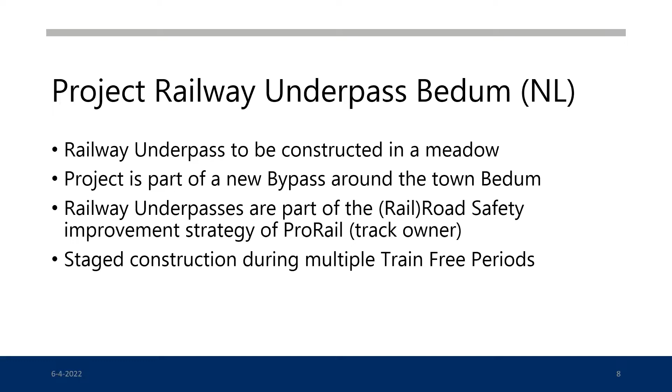These underpasses obviously have to cross an existing railroad track, so the work is done during multiple train-free periods. Those train-free periods are during a weekend, so no detours, just no trains for 24, 36, or even 72 hours. Those trains are replaced by coaches, so traveling during that period will take much longer. The promise of the contractor is that trains have to be back on track by rush hour Monday morning, otherwise they will get huge claims for logistics problems, more coaches, and loss of time and turnover by companies who depend on it.

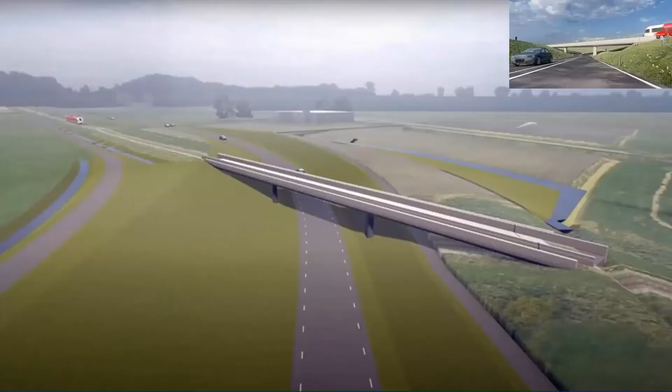This is what a typical level railway intersection can look like in the Netherlands, and this is what we would like to make in future. What you also see is that the road is separated from the bicycle lane, so safety increases much in this case.

The rail deck foundation that you just saw on the artist impression is bearing on 2 abutments with 8 screw injection piles with a length of 75 feet each, and 2 intermediate piers with 12 screw injection piles each, up to 101 feet.

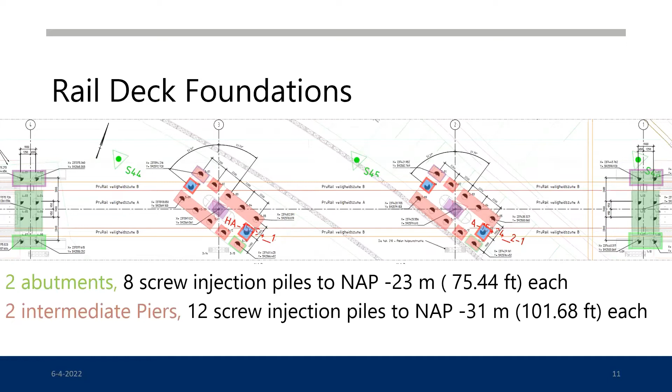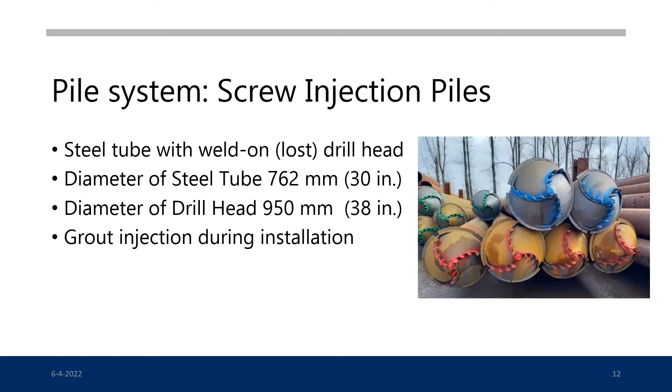For those who have never heard of this screw injection pile system, it's quite common in the Netherlands and Germany. In this case, we use a steel tube with a lost drill head, but we also make these piles with a temporary casing which is extracted after pouring concrete in situ. In this case, a lost steel casing with a diameter of 30 inches and a drill head of even 38 inches. We use grout injection during installation as lubricant and to improve the bearing capacity of the steel casing.

The soil conditions in this particular project are quite different from what we're used to in the Netherlands. In the Netherlands, most construction projects are in the west of the country, close to the sea, in one big river delta, where we have very soft clay, the Holocene layer, on a Pleistocene sand layer. The Pleistocene sand layer offers bearing capacity, and that's what all the engineers know - they know how to deal with it, and how piles perform in that particular layer.

However, in this area, when you look at the cone penetration test diagram, you see from 13 meters below surface, over-consolidated stiff clay. We know it is pot clay.

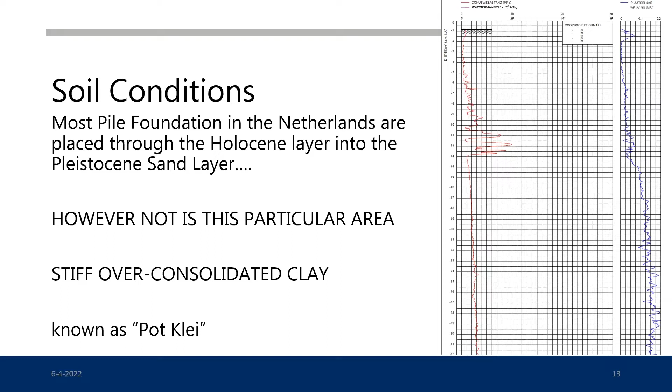This gives a whole other approach to bearing capacity, but in the Pleistocene sand layer, which I mentioned, we look at end bearing of piles and high friction ratios close to the pile tip. And in this particular case, we forget about end bearing, and we have to get this bearing capacity from shaft friction, but we don't know so much about this pot clay bearing capacity.

So we have a good couple of tests, but they are all very old. Statistically, they are much away from each other. So we have kind of safe values in our code, and it's not common practice to do pile tests in projects in the Netherlands. We are very much dependent on our design methodology based on cone penetration tests.

Also these pile lengths, which I presented, 31 meters, it's rather long for what we are used to. Luckily for this project, we had some training before we had to install piles during those train-free periods.

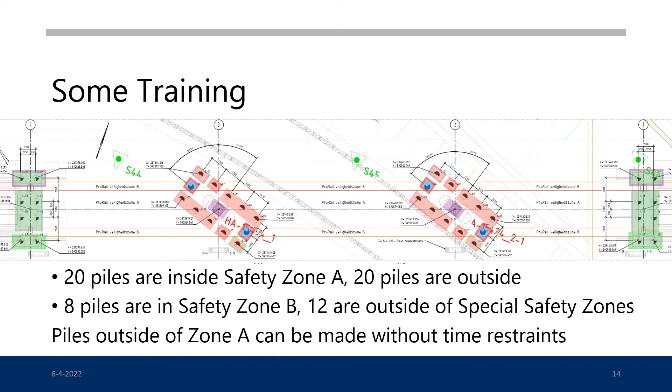Which meant that we could test our performance of installation before we were on this tight schedule of a train-free period. This is when we first found out test piles would have been a good investment, because some of those training piles took over 6 hours. We only budgeted for 2 hours. Yeah, that's a pity as a contractor. However, that's your own money, but not making it in a train-free period, that's a real problem.

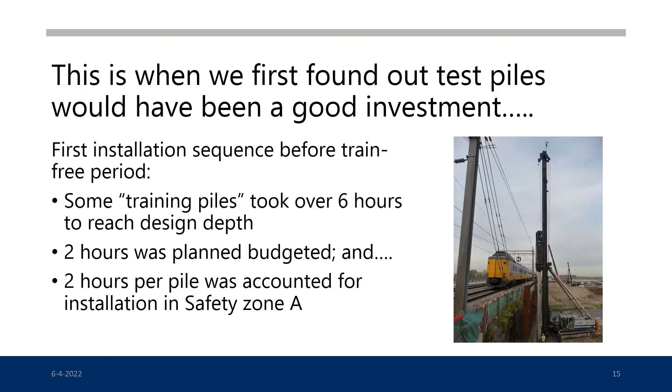The probable cause of these disappointing installation results were the limited effect of the cement grout in clay. Normally we use cement grout in sandy layers, and it helps us as a lubricant to screw those piles to the design depth. The same case for these lost drill heads which you just saw. Those seem to be less effective in clay.

Another factor was because these piles with those 30-inch tubes and 38-inch drill heads tend to start floating when they reach a certain critical depth. This was not looked at by the engineers beforehand. It's not that the piles come out, but at a certain moment the uplifting force tends to be higher than the pull down force of the piling rig, so you don't go anywhere.

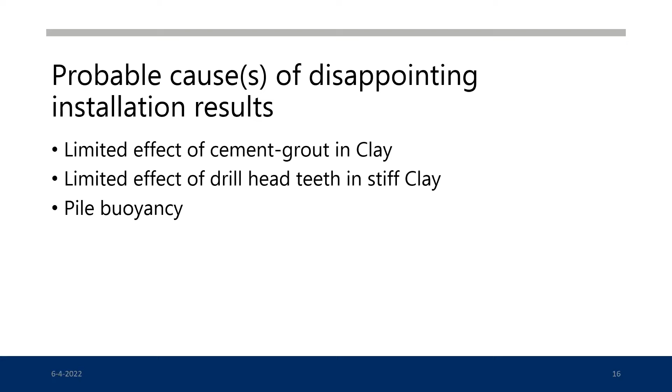So normally you use a grout with a low water binder ratio in order to have a high cement content, which gives your mixed in place mortar that you create during installation some strength. You take it as an interface so you can take into account a larger diameter in your design calculations.

In this particular case, the grout was only working against us during installation, and since the water could not drain properly in the clay, we were only pushing the pile up extra next to the floating problem after reaching critical depth.

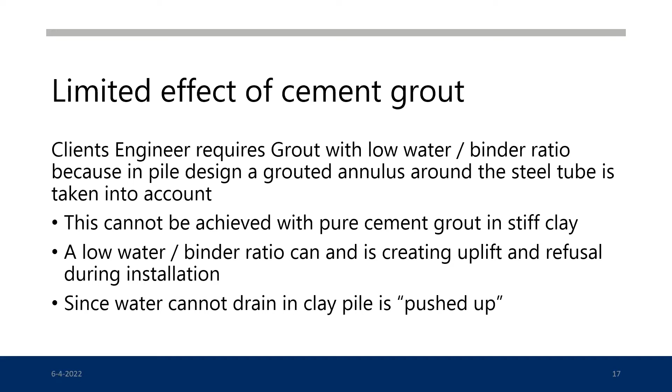The limited effect of the drill head teeth in clay. We found out during installation that the clay was clogging underneath the drill head between the teeth, and we get a bulb of clay underneath this drill head, and the teeth were not effective anymore. Normally in sands, they just cut through the sand and spread the grout around.

Well, and we have a very efficient installation process.

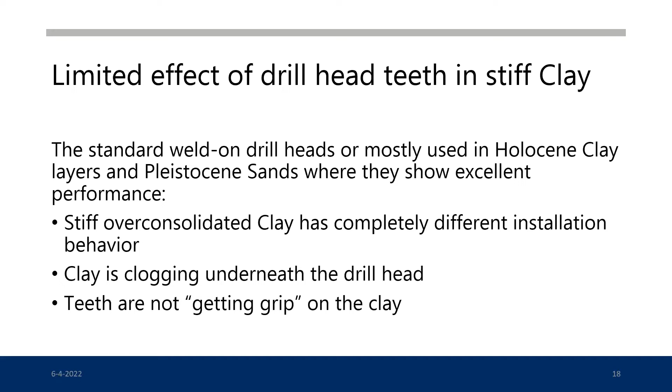About buoyancy, this could have been foreseen. Normally with smaller pile diameters, the weight per area is higher, and you have your rig's pull-down force, which is much higher than the buoyancy of the pile.

What we normally do when we have large diameter steel tubes with a closed toe, we fill this with concrete during installation. However, in most cases, we don't have reinforcement over the full length of the pile, so you fill it until the end of your reinforcement cage, so you can place the reinforcement cage only after installation.

But in this particular case, we had reinforcement cages over the full length. So in order to fill these piles with concrete during installation, the cages had to be placed also during, or even before, installation.

Because we were looking at pile installation during a train-free period with a cycle time of only 2 hours per pile, we later placed these reinforcement cages in the steel workshops where the steel tubes were assembled.

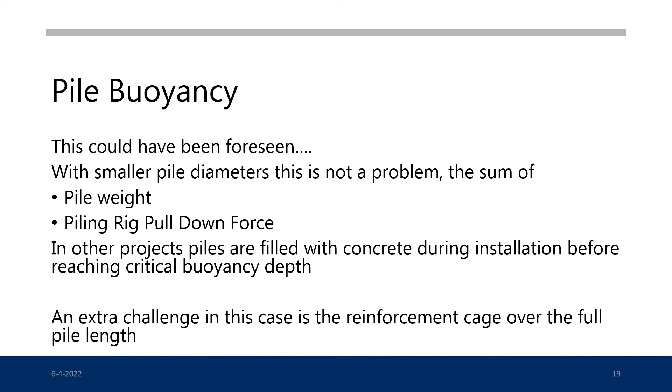Well, the measures taken to improve installation cycle time in the second training were a decrease of cement content in grout. We discussed it with our client, with the engineers, and together we decided to add some bentonite to the grout, but still with a large cement content.

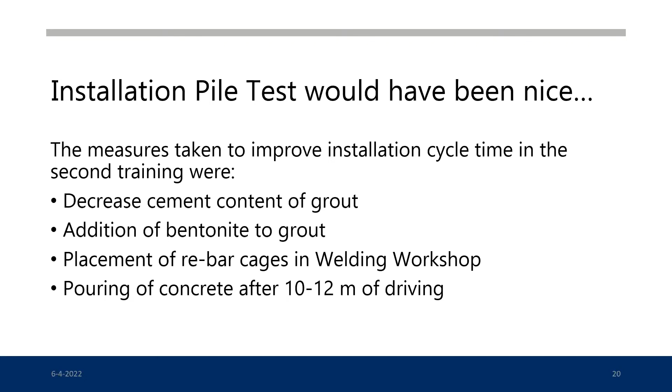As I just said, placement of the rebar cages in the welding workshop, so no extra works on site. And pouring of concrete we did with a concrete pump truck after 10 to 12 meters of driving, so before reaching the critical depth for buoyancy.

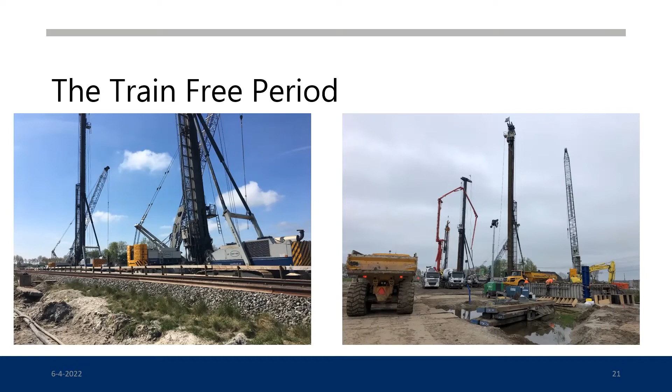Well, this is what it looked like, the left-hand picture just before start of the project, and at the right-hand picture, the tracks are taken away, and nobody has an idea that there has ever been a railroad track. But on Monday morning, it looks again more like the left-hand picture.

Well, all piles were installed successfully in the available time frame. So the trains were running on Monday morning along the tracks that were brought back in place, just on the normal ballast bed that was in place before we placed the piles. So the piles are not yet in function, but they are there for the next construction stage.

Well, the next construction stage would be within about 2.5 months. But after evaluation of this first train-free period, we found out when checking the piling logs that there was high water usage during pile installation, low cement usage, and bentonite - well, we used much more, kind of in line with liters of water.

Grout density at the start was too low. Grout density halfway the installation process was too low, and finally the grout density at final depth of pile installation was okay.

Normally during installation of these type of piles, you have your grout backflow. So probably, while reaching design depth, all the grout with low density is already displaced, replaced by grout with a higher density, so with the agreed cement content. However, you cannot prove that there is not either a bentonite interface on your steel tube or between the soil profile and your grouted annulus around the pile.

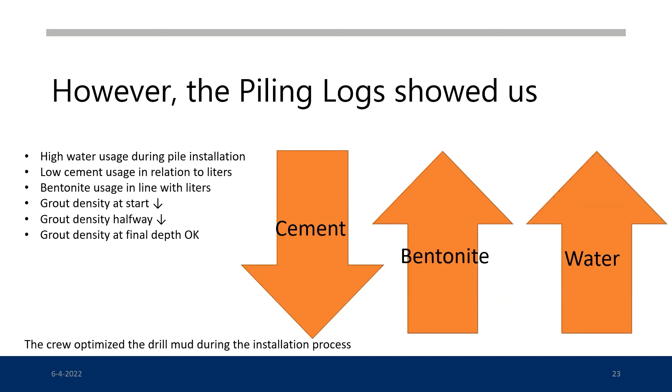So that was a problem. We had a crew who optimized the drill mud during the installation process and managed to install those piles on time, but we obviously did not do what we promised.

So we discovered at the end of August 2021 that we had this issue. The next train-free period would be on October 22nd, 2021. So we had 2.5 months to go to prove the piles had the required bearing capacity. Normally, when you have some piles that are not trusted, you can test them, and in that way prove they are okay. In this case, we only had the installation logs that showed we did not do what we agreed.

Nobody had much experience with this type of soil, and no consulting engineers or other contractors did either. The piles were under the railway track, so we could not test them. We had 2.5 months to install sacrificial model piles and do the testing that should have been done beforehand, before the next train-free period.

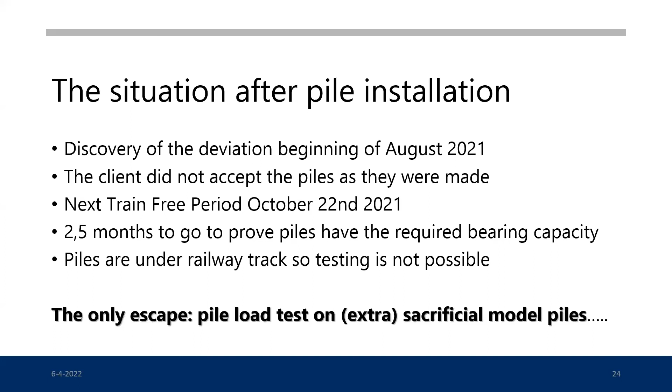What was above our heads? Scenario 1: the next train-free period could not be used to place the deck. So you get a change of design, a modification of the foundation, and if you modify the foundation you obviously need more piles, which means modifications to the deck.

Two extra train-free periods would be required: one to place the extra piles, and one for the deck placement. And you have potential claims between 500,000 euros and 1.5 million euros, plus a lot of reputational damage in the industry.

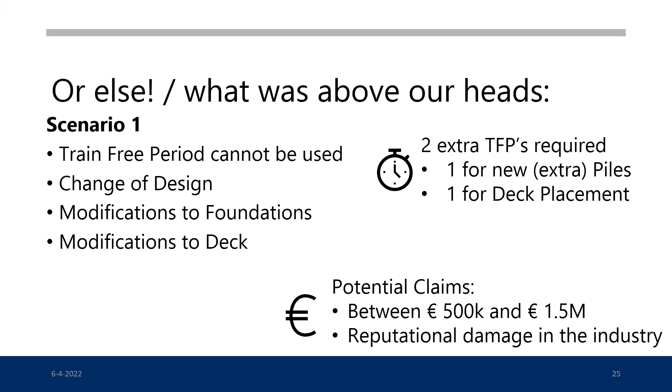Scenario number 2 was even worse, but we were the ones who pulled the brake to avoid it. If our client accepted the piles as they were on a theoretical motivation, we would have risked unacceptable settlement after commissioning of the underpass. This meant risk of severe delay damage, taking the train tracks out of service, potential claims certainly above 1.5 million euros, and severe reputational damage, not only in the industry, but probably an 8 o'clock news item.

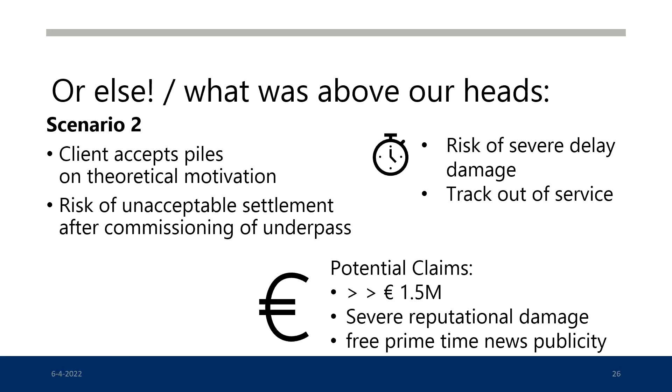We had 2.5 months until the next train-free period. It took us 4 weeks for the test setup design and additional soil investigation at the place designated for the test piles, followed by immediate installation of test piles, with a setup period to develop the shaft friction.

This took 1 month. After installation of the test piles, together with our client, the contractor, we informed the railway authorities and local authorities, and agreed on the test result interpretation protocol. There was no time to inform them before, because we knew if we got into a discussion about this setup, we would for sure not make it in 2.5 months.

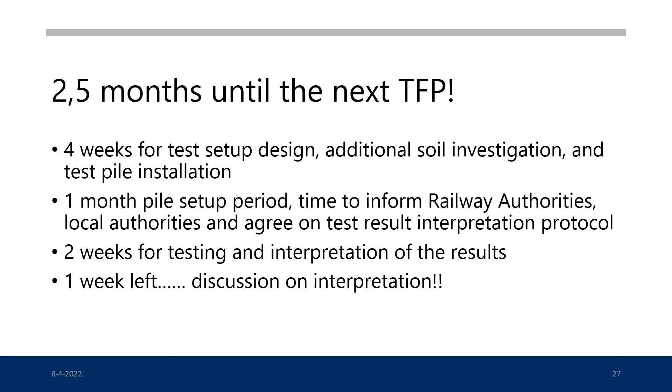After 2.5 months, we had 2 weeks for testing and interpretation of the results, with 1 week left. Here you see a picture of the test setup.

We took scaled piles, 22 inches, with a grout composition as found back in the pile logs from the piles installed during the train-free period—so with low cement, much more bentonite, much more water. We had a test setup with 325 metric tons in kentledge capacity.

The pile failure load, we found out, was about 200 metric tons. Why then a 325 metric ton setup? Because we could not agree on the actual pile bearing capacity, taking into account all the layers that are there but do not contribute to the bearing capacity, yet would definitely interfere with the testing.

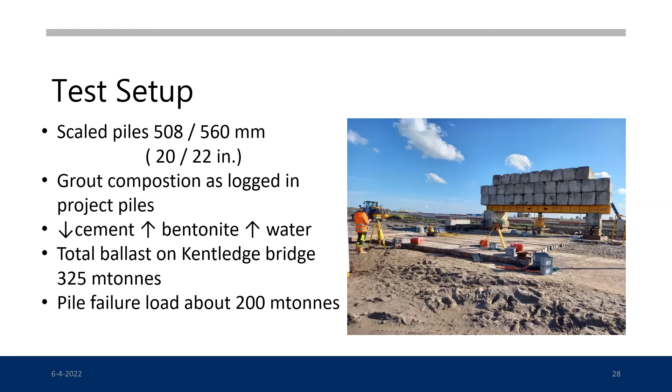We needed this extra week badly because of strain gauge interpretation. Short story: you can never have enough strain gauges, because some went out of service. There was some discussion about the trajectories below the strain gauges, which could have been divided better if we had used more strain gauges.

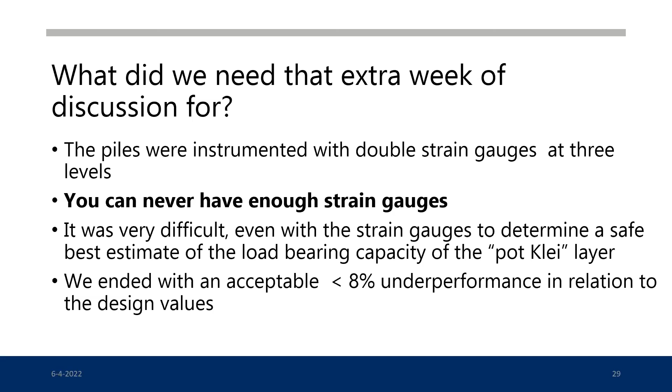In the end, we found a safe best estimate of the load bearing capacity of the pot clay layer, which was what it was all about, and we ended up with an acceptable less than 8% underperformance relative to the earlier chosen design values. We had about 8% left in our safety factors, so we saved the day.

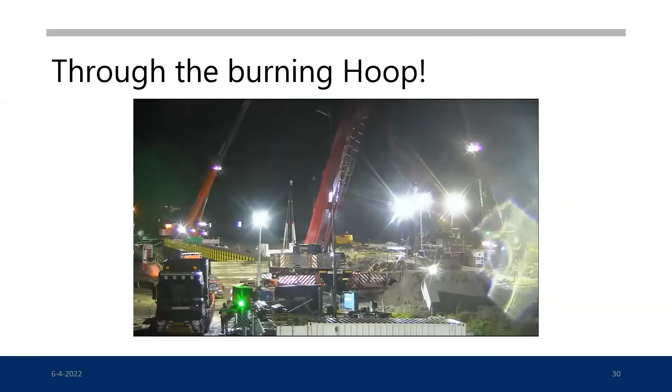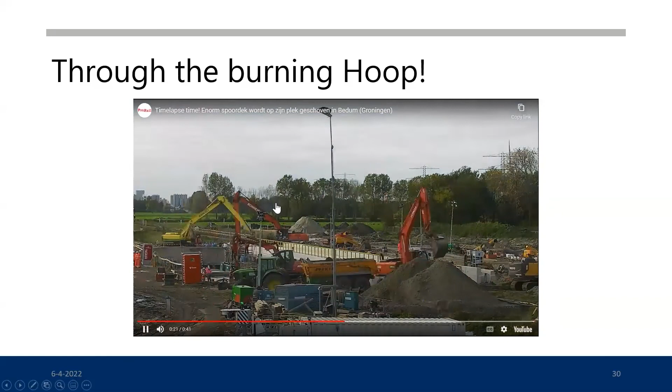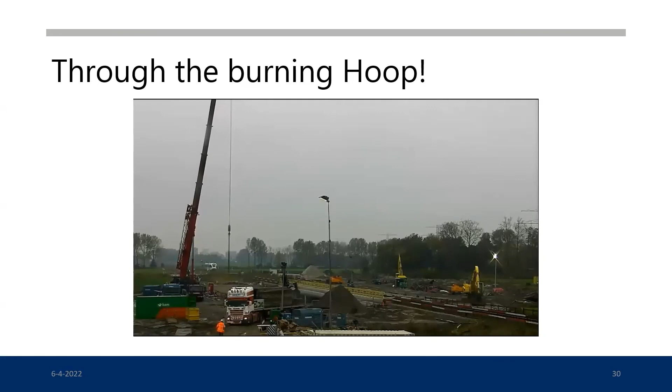Then I want to show you this video, because this is what happened during the weekend from Friday 22nd of October until Monday morning 25th of October. On the left hand side, which I point out with the cursor, is the new railway deck. The excavators already took out the tracks and the whole railroad. The rail deck is pushed into place, and the test train runs.